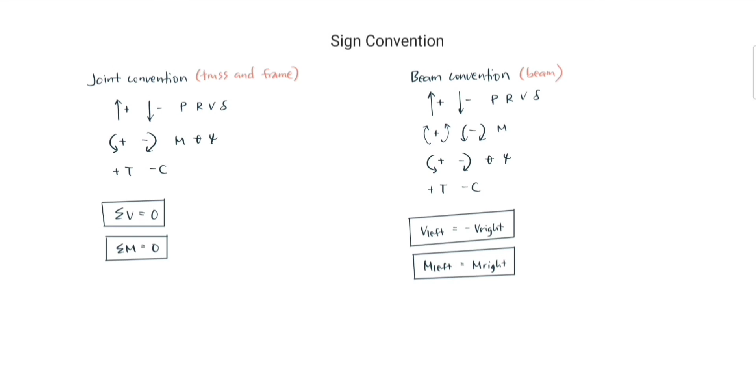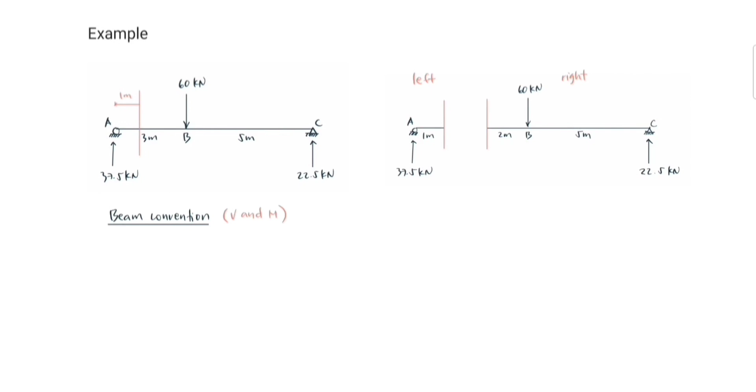Next, isolve naman natin yung shear and moment using the beam convention. Take note na kapag ang tinatanong ay shear and moment, ang sign convention na dapat gamitin ay beam convention. Para sa shear, piliin na muna natin yung left part. So the shear left is equal to, since the reaction at A is upward, so the shear is positive 37.5.

Para naman sa shear right, the shear is equal to, since the load is downward, so negative 60, and the reaction at C is upward, so positive 22.5. So the shear using the right part is equal to negative 37.5. So para sa shear, ang pipiliin natin is the left part. So the shear at the cutting plane is positive 37.5.

Then recall para sa beam convention that the shear left is equal to negative shear right. Shear left is positive 37.5 and it is equal to negative of shear right, negative 37.5. So confirmed, tama yung property. Next, para naman sa moment, may dalawang options, left and right. So unahin na muna natin yung left.

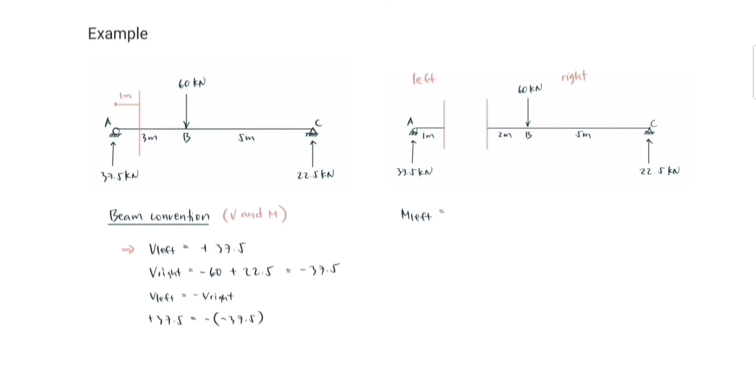So moment left is equal to, take note sa beam convention na ang positive moment is upward and negative moment is downward. And since upward yung reaction at A, magpo-produce siya ng upward moment. So therefore, the moment is positive, the force is 37.5 times the lever arm 1. So moment left is equal to positive 37.5.

Moment right is equal to, since yung load ay downward, magpo-produce siya ng downward moment. So the moment is negative 60 times the lever arm 2. Since the reaction at C is upward, magpo-produce siya ng upward moment. So the moment is positive, the force is 22.5 times the lever arm 7. So the moment using right is positive 37.5.

Recall, sa beam convention, ang property, moment left is equal to moment right. Moment left is positive 37.5 equal to moment right positive 37.5. So confirmed na itong property na ito is correct.

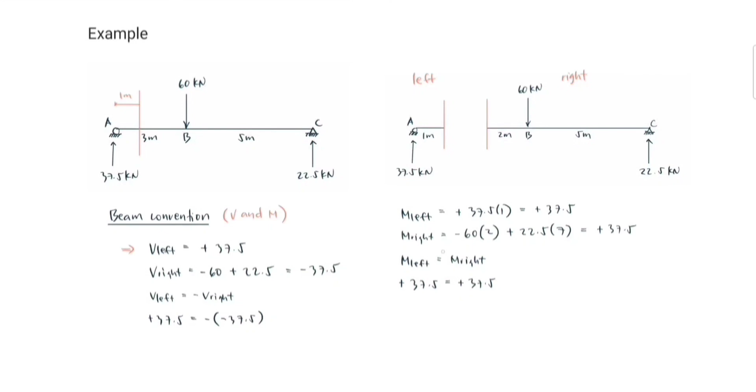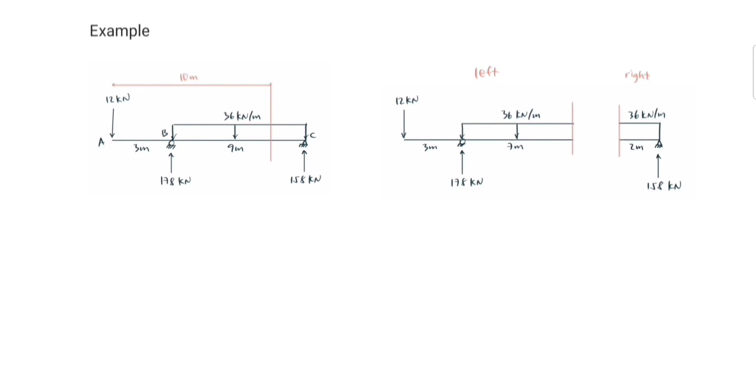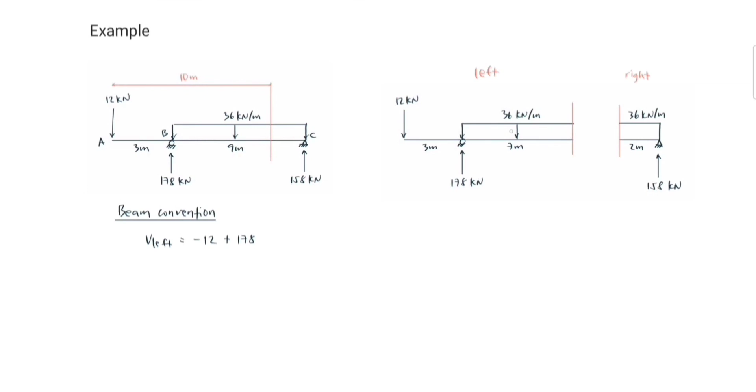Next, solve for the shear and moment using the beam convention. Para sa shear, pwede nating piliin the left part or the right part. Considering the left part, V left is equal to, due to the concentrated load downward, the shear is negative 12. Due to the reaction at B upward, the shear is positive 178. And due to the uniform load downward, the shear is negative 36 times 7. So V left is equal to negative 86.

Considering the right part, V right is equal to, due to the uniform load downward, the shear is negative 36 times 2. And due to the reaction at C upward, the shear is positive 158. So V right is equal to positive 86. Then property para sa beam convention that V left is equal to negative V right. V left is negative 86 equal to negative V right is positive 86. So confirmed, tama yung property. Obviously, magkaiba ang V left and V right, so ang pipiliin is V left.

Para naman sa moment, pwede nating piliin the left part or the right part. Considering the left part, M left is equal to, due to the concentrated load which is downward, magkakaroon ng downward na moment. So the moment is negative, the force is 12, times the lever arm is 3 plus 7 or 10. Due to the upward reaction at B, magkakaroon ng upward na moment. So the moment is positive, the force is 178, times the lever arm is 7. And due to the uniform load downward, magkakaroon ng downward moment. So the moment is negative, the force is 36 times 7, times the lever arm is kalahati ng 7, 3.5. So M left is equal to positive 244.

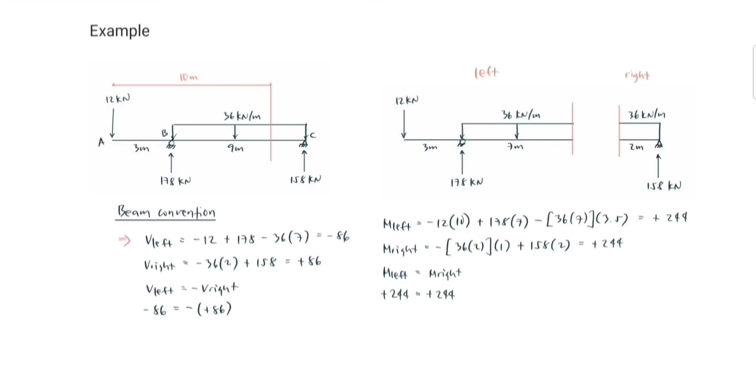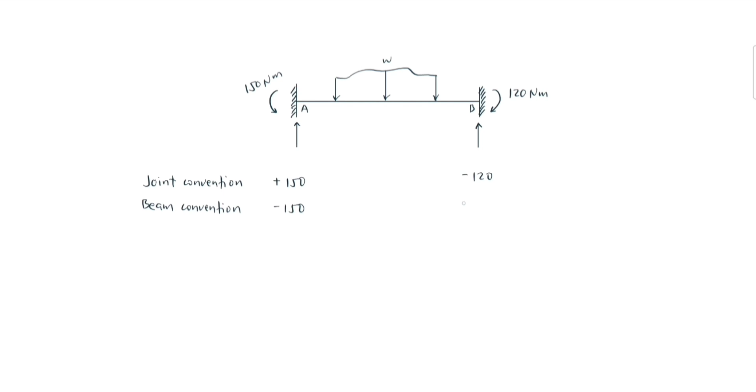Linawin natin yung sign convention para sa moment. Say given is a fixed beam subjected sa distributed load. So nagkaroon ng force reactions and moment reactions sa dalawang supports. Say sa kaliwa, ang moment reaction is 150 counterclockwise and sa kanan naman ang moment reaction is 120 clockwise. Considering the joint convention, since the moment at A is counterclockwise, then the moment at A is positive 150. Since the moment at B is clockwise, so the moment is negative 120. Next, consider the beam convention. Since the moment at A is downward, so it is negative 150. And since the moment at B is downward, then the moment at B is negative 120.